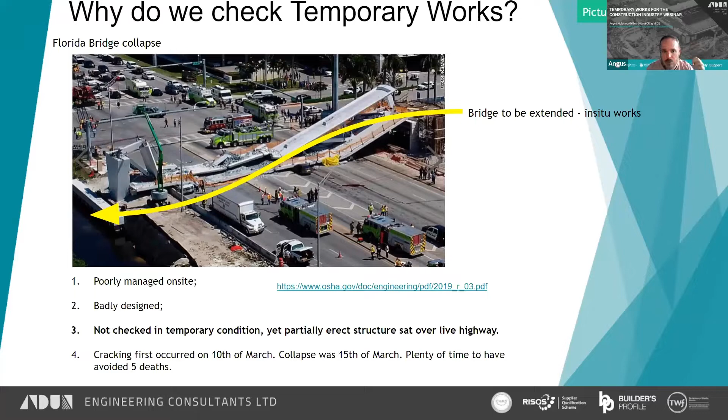And then perhaps the most shocking thing of all is that the cracks that led to this failure were actually discovered 5 days before the bridge collapsed. I still can't quite believe how they got to this point with live traffic running underneath it and nobody stood up and said, hang on a minute, this is crazy. But there you go, it's a worrying one.

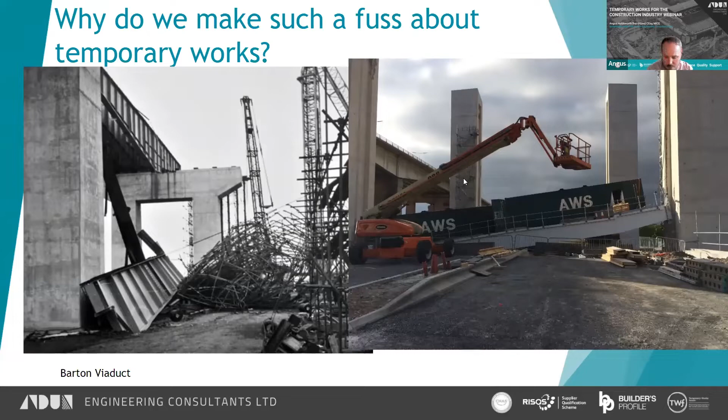So temporary works failures in this country - in the 60s and 70s, well, late 50s, 60s, 70s - there were quite a number of them. Barton Viaduct in Manchester, quite a few formwork and falsework ones, which I touched on a few webinars ago. We went through them. Fairly recently, 2016, there was a lift bridge in the temporary condition that failed just next to the Barton Viaduct in Manchester. So these failures are still happening regularly.

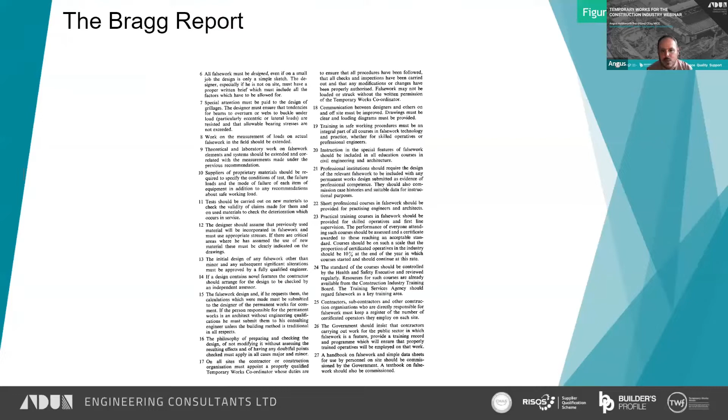Now, the collapses back in the 60s and 70s led to what we know as the Bragg Report, written by Lord Bragg. In there, he made, I think it was 27 or 28, suggestions or things that the construction industry should investigate and should start doing. You can see 6 to 27 here. The ones that interest us in relation to checking are these ones.

Interestingly, this was written specifically for falsework. We've now kind of extended the Bragg Report and BS 5975 out to take into account all temporary works. So where it says falsework here, read that as temporary works. One of the first points is that the initial design of any falsework should be signed off by a fully qualified engineer, along with significant alterations.

That makes its way into 5975. If a design contains novel features, it should be checked by an independent assessor. Again, that is in 5975 - or is it? It's certainly the Network Rail guidance. This one here is an interesting one, which we've kind of gone away with in the latest version of 5975.

The falsework designer should supply the permanent works designer with calculations for comment. In the latest version of 5975, it clearly states that calculations do not form part of the output. So that's an interesting one - I hadn't picked up on that. We've gone away from that in 5975, and there must be some reason for it, but I'm not really sure what it is.

So the philosophy of preparing and checking again, and checking the design, of not modifying it without assessing the resulting effects, and of having any doubtful points checked. That talks quite a lot about checking, and that's all fairly well formalised in 5975.

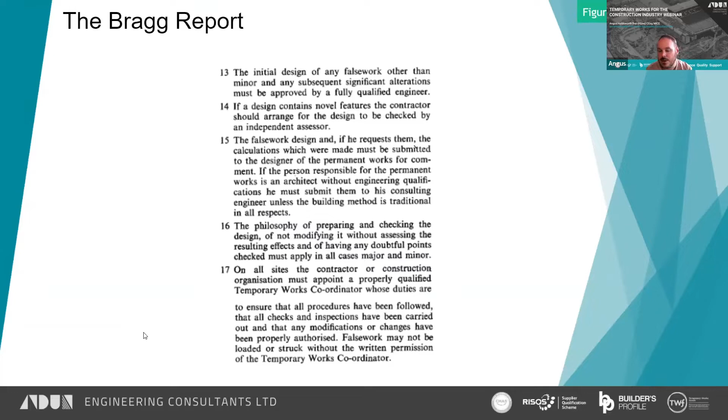Right, why do we check? Sorry, I'm just going to have a bit of a problem with my screen there. Why do we, or it certainly seems to me that we pay a lot more attention to checking temporary works than we do permanent works.

There are circumstances where permanent works might get Cat 3'd or what we would call Cat 2 checked, though I don't think it's quite as common as it is within temporary works. For permanent works, it's quite often just another engineer reviewing the calculations and the drawings rather than going away and doing their own independent assessment.

But one of the reasons is with temporary works, there have been a lot of failures that have led to people dying, as I've said. Bragg Report tells us we should do.

And when you think about it, or when you look at it, construction and demolition is fraught with issues as permanent structures in temporary conditions. These might be conditions or loadings that the structure has never seen before.

We have comparatively large loads applied to temporary structures quite often, and they're not normally as heavily built as a permanent work structure. So large loads could be tower cranes, could be mobile cranes, piling rigs, stockpiled materials, all of these things. There's often a lack of information on the historical structure, so that's where you're dealing with an existing structure, obviously.

Poor permanent works designs, which makes construction far more hazardous. If you've tuned into these webinars before, you would have seen examples of this.

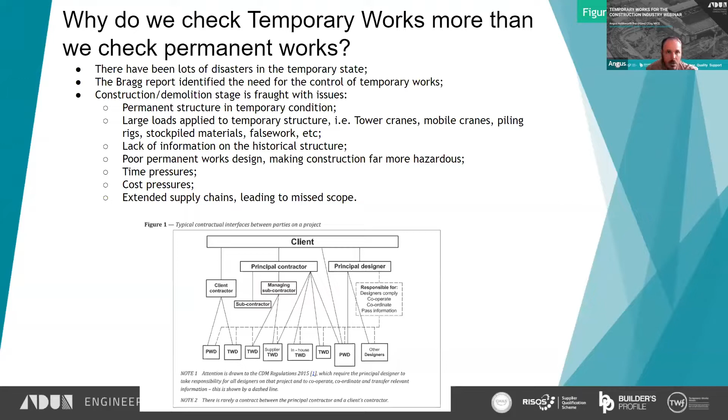So when you say the word checks or checking temporary works, people often jump straight to, oh, it's a Cat 1 or a Cat 2 design check. There's a lot more that goes into checking temporary works than just that. There's checking the information provided in the brief.

So that's looking at the brief, looking at what we've been provided with, and checking and understanding what it is we need to do as a designer.

Checking the correct information is used in the design. So again, what has the brief told us? What do we know about the structure already? What other information do we have that we can use to facilitate the design?

A massive part of checking to me is making sure the design looks right. If a design looks right, it stands a good chance that it is. If something looks wrong, 95% of the time it is going to be wrong. It's a very old saying that if it looks right, it is right, but it really does work in reality, and you can often spot issues just by looking at a design very quickly.

A key part to me is this idea of checking what the design has done on paper feeds into what the drawings show. So in many design offices, you have the engineer and you have the draftsman.

That straight away leads to an interface where what the engineer wants and has done has to be produced in the drawings. We work slightly differently - we don't have draftsmen, we have engineers who do the engineering and the drawings as well, to cut down on that interface. It's the way we've always worked. It means the person doing the design is also doing the drawing, which we believe leads to a better product because there's no interface. Often when you're doing the drawing work, you spot something you'd do slightly differently to the design. Often the drawings and calculations are done in tandem, which leads to a better solution quite often.

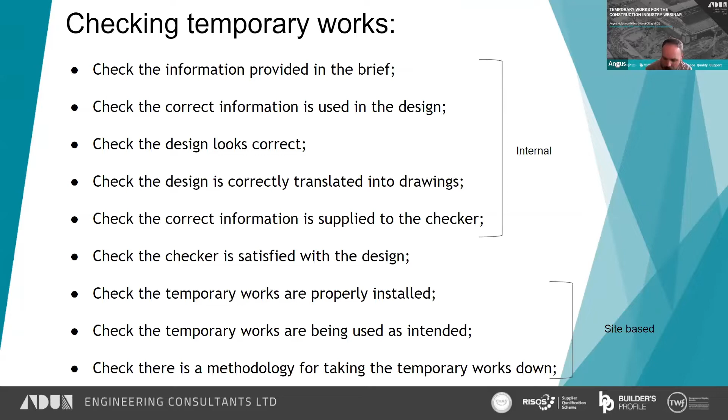So checking the input - we have this saying, it's not ours, but GIGO, garbage in, garbage out. It's one of the things we spend a lot of time drilling into the more junior guys who've joined us more recently. If you put the wrong input in, you're going to get the wrong output out. You can't help it - if you've got the wrong information at the beginning, what you produce is not going to be correct. A lot of that comes back to the quality of the brief you're given.

The classic with temporary works engineers is where the client specifies in the brief that we want to use RMD, or maybe we want to use MGF components. You complete the design using those components, send it back to them, and they say, oh no, we wanted to use such and such - even though the brief requested one thing. It's time and money wasted.

The brief document really is, to us, the most important thing there is when you're doing design, and indeed when you're checking, because the checker needs to look at the brief as well and ensure the design complies with it. So the brief should be quite a detailed document. It's obviously relative to what you're designing, but it should highlight everything the TWC or project manager on site has in their head about what they're trying to do, the constraints on the site, etc. It should be fed through so the designer can take that information, read it, understand it, and use it.

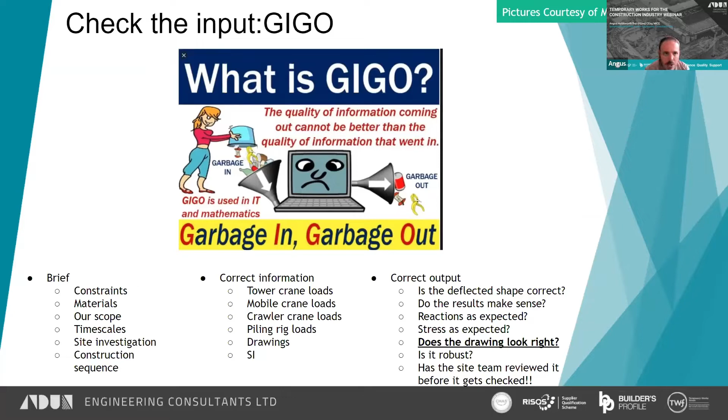So the checking that you're probably most familiar with when we talk about checking is these check categories from 5975. They go from 0 to 3, with 0 being the least onerous, 3 being the most onerous. 0 is really for standard solutions, off-the-shelf products you can use, and you're just basically looking at the instructions and saying, yeah, it complies with that.

Category 1 is for fairly simple designs. We're going to go through some examples a bit later on, but the examples given here are formwork, needling, propping to brickwork, that sort of thing. So with a Cat 1 design, there should be a formal design undertaken, but the checker just has to be someone who hasn't been involved in the design. They can pick up your calculations, read through them and say, yep, I agree with what you're saying here. Good to go, sign the check certificate, job done.

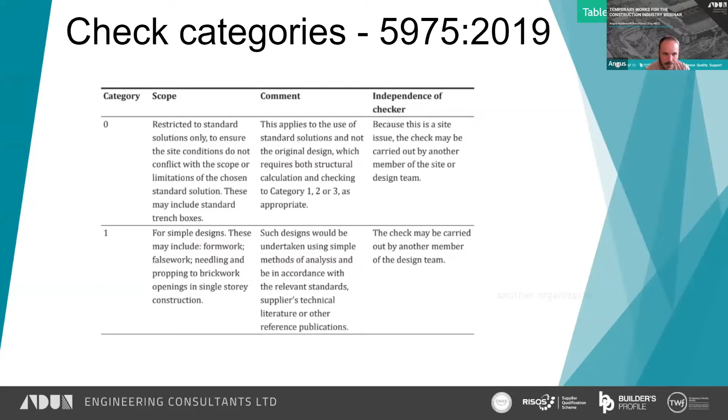Category 2 checks is a bit more onerous than that, or quite a bit more onerous. If I did the design, or someone in the Chelmsford office did the design, ideally we would try and send it to one of the other offices for the checking. Not always possible, but ideally you would send it to another office where you can say with certainty that they weren't involved in the original design.

And then what you issue them is the design brief, your design methodology, and the drawings. You don't issue them the calculations at all. Then the checker works from that input information - the drawings, the brief, and the design methodology - and they do their own set of calculations to demonstrate that the structure works. So you should be receiving 2 sets of calculations, 2 independent sets of calculation. A Cat 2 is not a review of the designer's calculations. Never has been, never will be.

Category 3, similar to Category 2, except instead of another office, it goes out to another company. Interestingly, the definition in 5975 is another organisation. That will be interesting when we get to looking at the Network Rail definition, because it's slightly different to 5975.

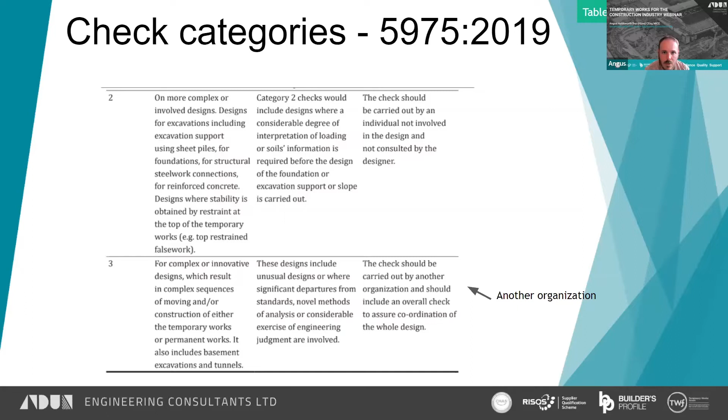This is just a blurb that comes in 5975, which spells out certain items. I'm not going to read them all out.

Again, I'm going to touch on Category 2 and Category 3. The checker should carry out the checks without reference to the designer's calculations, using only the design brief, including associated information and the design output.

Okay, it says it there in black and white. The number of times we see designs that are supposed to be in Cat 2 checked, and all they've done is read through the calculations and put their signature in the top right corner. That's not a Cat 2 check. It can't possibly be, because you've looked at the calculations.

The reason we do Cat 2 checking is because it's very easy to take somebody's design and follow through their methodology and say, yeah, well, that makes sense. Whereas if you take a step back and have to think about the problem yourself from the basic input information, you will approach it in a different manner, and you will then be able to check the

design separately. You're not going to follow what I'd call going down a rabbit hole and follow what the designer's done. So they might have made a silly assumption that seems reasonable, but by standing back and reflecting, you come to a different conclusion. That is the point in a check. It's not just to prove that everything's bang on. It's for you to sit and look at it separately and say, well, hang on a minute, have you thought about this?

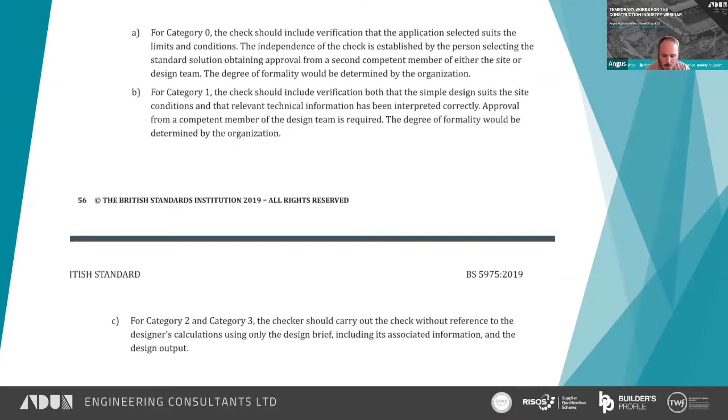I don't know why that's blank. So within 5975, we have this - what's it called - terminology, the implementation risk, which shouldn't be confused with the check category.

Okay, I still can't quite get my head around this as a system, but the idea being that you can have something that's high hazard to build that is low hazard as a design check.

Now, that might well be the case theoretically, but I'm yet to see it in practice where you have something high hazard, such as, I don't know, like a trench box that's being put in next to a railway or something similar. I've never seen in practice that would still get a lower level of checking, because although the design is still fairly simple, the hazard of failure is high. So I've always seen that people still want a higher level of checking than if that was just a trench box in the middle of an open field.

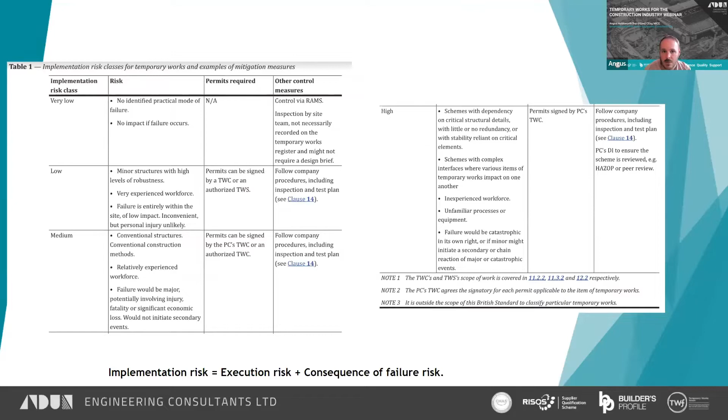So for instance, if you checked a trench box over here, it would be low on the implementation, might even be very low. No, probably low actually looking at that, on the implementation risk, and you'd probably get away with a Cat 1 check. It might even be Cat 0, but the chances of you being able to do it in here next to network rail infrastructure, implementation becomes high, but in practice, I would say that the check level would also become high. So although the 5975 says these two things are supposed to be separate, I don't believe that's how it's working in practice.

But I'll be interested to hear what anyone else has to say from their own experience. I'm not seeing it currently, but there you go.

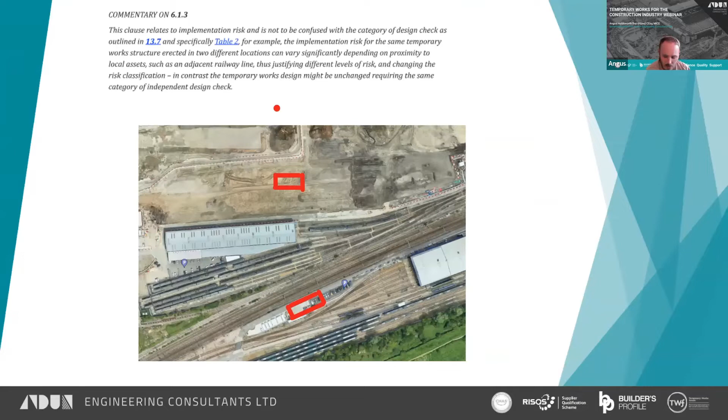Right, so Network Rail also identifies check categories themselves within Civ 003, which is now on issue 7, I believe. Fairly similar, though there are some slight differences to 5975.

So Cat 0, same design team, different member of staff. It's a review. There's a little bit more guidance there, but nothing drastic as a change.

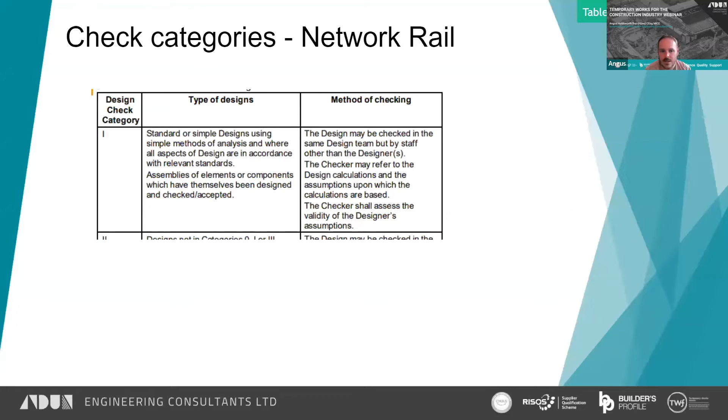So it says there, Cat 1, the checker may refer to design calculations and the assumptions. The checker shall assess the validity of the designer's assumptions. Yeah, fine, very similar to 5975.

Then we get to Category 2 and Category 3. Interestingly, in 5975, the definition of a Cat 3 checker is a separate organisation. In Civ 003, it's a separate legal entity. Now, that's not much of a change, but the way I understand that is there has to be a completely standalone organisation, i.e. there's two separate PI insurances in place, is the way I've seen it, and it's been discussed in the past.

So if it's a larger organisation, they hold one PI policy, but there's almost, let's say, 2 trading names, you can't do a Cat 3 check because it all comes back to the same legal entity at the top. Whereas if it's 2 entirely independent companies, that clearly falls under the definition of a separate legal entity.

Guidance is fairly similar, but again, design checks should be carried out without reference to design calculations. It's in black and white there for category 2. The design check methodology and analysis shall be independently derived against the common set of design criteria.

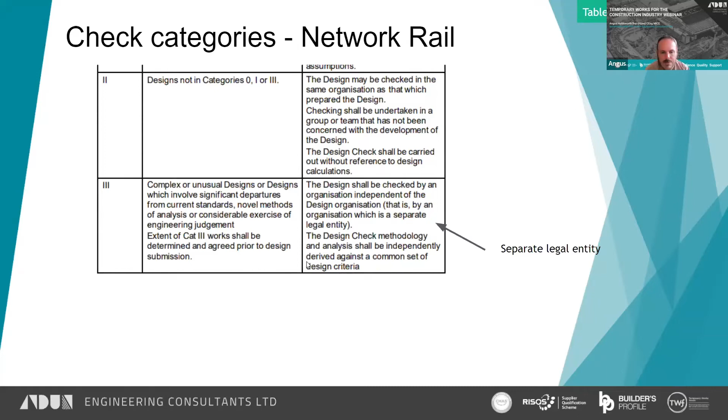Again, it's a little bit slightly different the way it's worded. CIV/003 does go into it in a bit more detail in here, specifically as to what they want to see for Cat 3 checkers. And interestingly, Network Rail specifically asks that the software is identified in the checker's statement. I think that's to make sure you don't end up with the designer and the checker using the same piece of software, which isn't ideal, does happen, but ideally you would use 2 different analysis software if you could. That's not always possible because some software there's only certain things they can do.

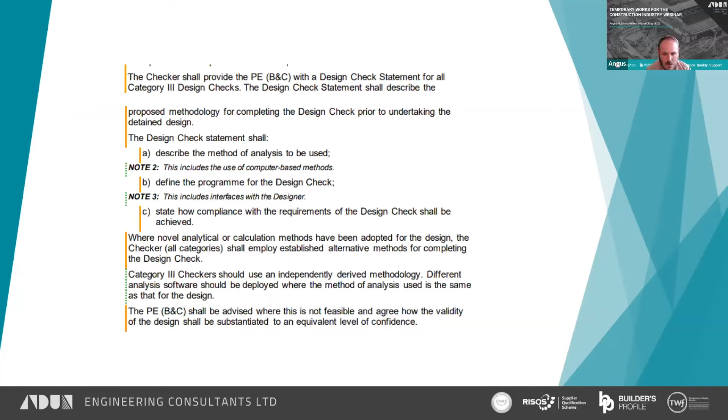Again, you can read all this yourself, but the key point to take away is they expect the category 3 checker to come up with an independently derived methodology. It's not, you shouldn't just be looking at what the designers put in the design statement and just following it. They want you to think about it differently to ensure that you've used a different methodology and that Cat 3 check is okay.

So people often want to know what these different categories mean, and how you categorize things. I guess the simple answer to that is you have to use your judgment. It's not necessarily something that can be written down in black and white, though I am just about to attempt to do exactly that. However, these are examples. I don't know your site constraints, I don't know anything about your project, I don't know about the competence of the people installing it, etc. You need to look at it yourself and decide what category of risk it is. As I've said, I'm not a fan of tabulating it and saying this is automatically a Cat 1 or a Cat 2 or a Cat 3, because it depends on lots of things.

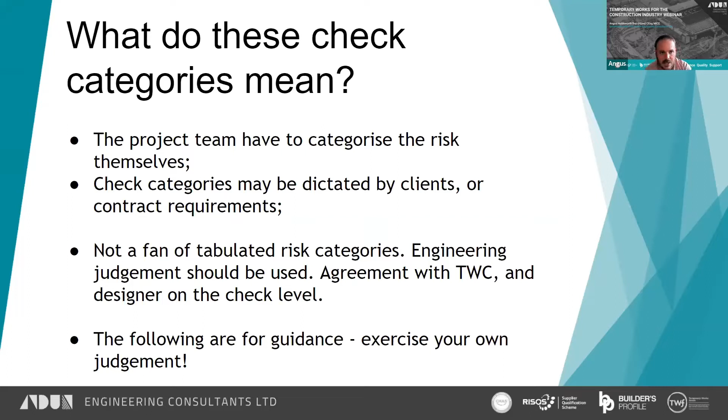So category 0 check, a simple thing like a trench box. In fact, many suppliers now have off-the-shelf design packages available for these, that clearly identify when they can be used, when they can't be used, what the surcharges are, what the maximum pressure is. It's a simple case of taking the instructions for the trench box and then looking it up and saying, yep, I comply with those constraints. Job done.

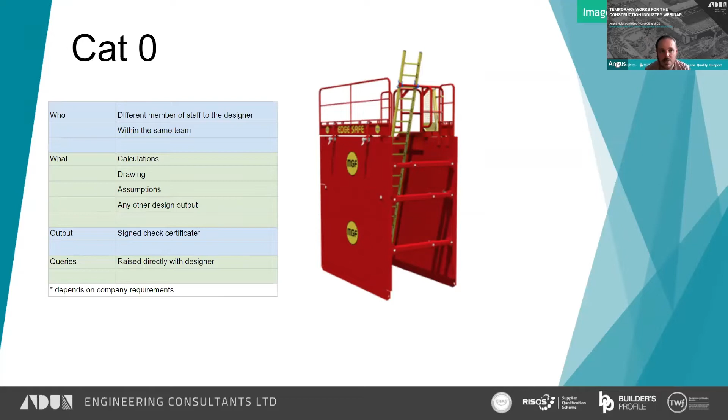Someone else can then look at those calculations, or it might not even be calculations. It might be as simple as identifying in a brochure what you're using and why, and then agreeing that it's okay. There are plenty of other trench boxes available, I just found a nice picture of an MGF one. There's loads and loads of suppliers.

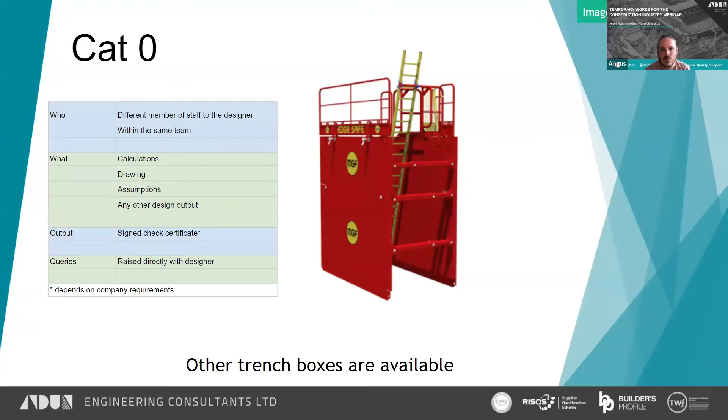Anyway, so within CIV/003, Network Rail have listed out a series of items they consider to be Cat 0, which again you can read there. I'm not going to read through all of them, just going to pick out some interesting ones. So site hoarding only needs to be Cat 0 unless it's on a platform. Edge protection where it's for construction organisation, that's fine. Ground support for scaffolding, so foundations for scaffolding, where it's fairly obvious it works. Shallow trenches not exceeding 1.2 metre deep is their cutoff.

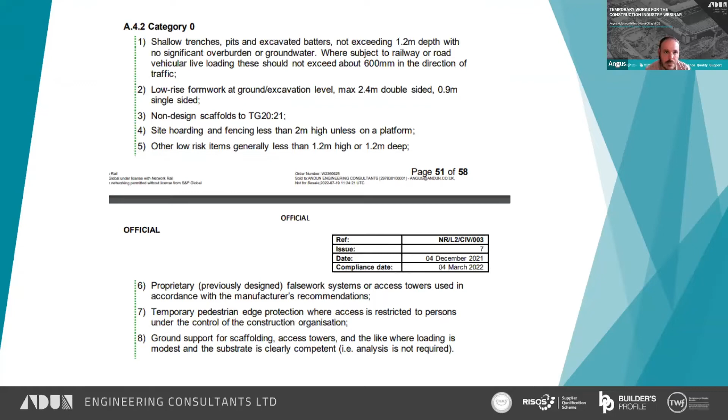That can then be reviewed by somebody in the same team, though not someone who was involved in the original design. You should be looking for them to go through the calculations and sign off and say, 'Yep, job done. I'm happy with that.'

There should be a signed check certificate still for Cat 1, and if there's any queries, you just raise it directly with the designer and resolve it between yourselves. Cat 1's normally an internal check or within the same company, so it should be fairly easy to resolve any issues between yourselves, I would hope. Otherwise, something's probably gone wrong.

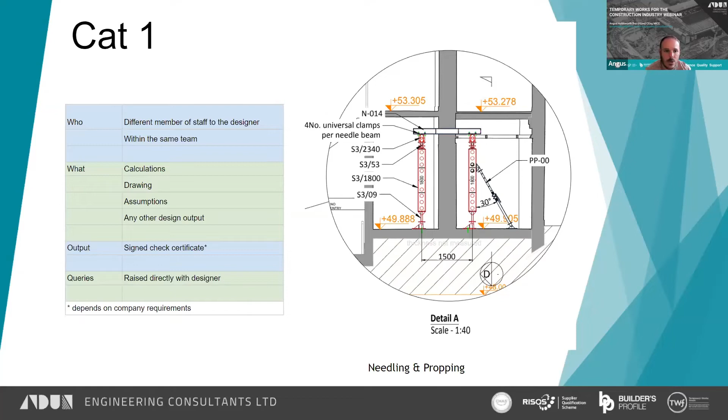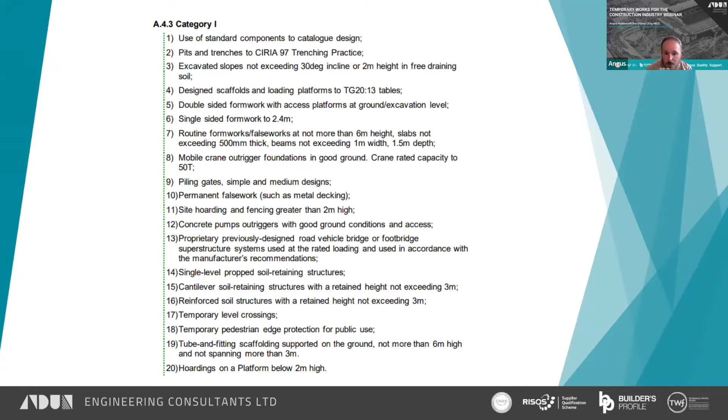Hoardings and fencing greater than 2 meters high falls into this. Reinforced soil structures with a retained height not exceeding 3 meters. Cantilever soil retaining structures, so sheet piles not exceeding 3 meters. Hoardings on a platform below 2 meters high. Interesting, that one - I'm quite surprised that hoardings on a platform get into category 1, but there you go.

Category 2. An example of this was a fairly simple demolition scheme where it wasn't in a possession, there was nobody going underneath the structure. It was all on a construction site on a disused road, no time constraints. So it was a fairly simple piece of demolition that really consisted of working out the weights of the steels and then lifting them down piecemeal with a bit of propping in the middle. A little bit of stability as you worked your way into the structure, but nothing too complex.

The designer should have produced, or did produce, drawings. You can see excerpts from them there, and they produced a design methodology or design statement, depending how you want to call it, and that was issued to the Cat 2 checker to undertake a Cat 2 check. They didn't look at the calculations, they worked from that information, and at the end of it, they gave them a signed check certificate and a design check statement to explain how they'd undertaken the check themselves.

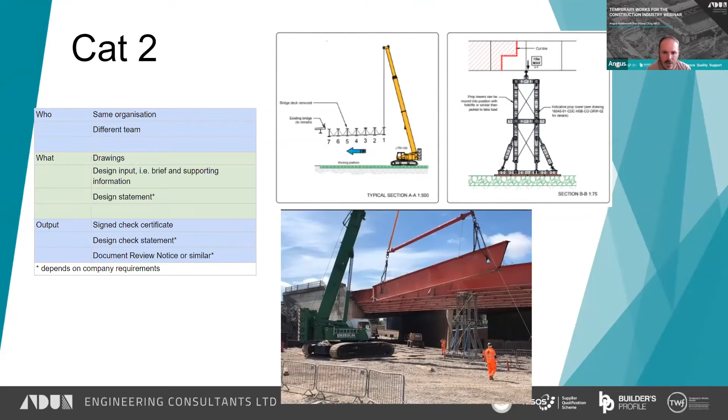And there should be now a 5975 required document review notice, a DRN form, for Cat 2 checks. So that just formally records what was identified as needing to be changed or needing further discussion with a checker, with a designer.

So in category 2, Network Rail have quite a lot more information or options in there. Underpinning gets into category 2 checking, barge mounted equipment gets to Cat 2, facade retention schemes goes into Cat 2, conventional tower crane bases is Cat 2, temporary station platforms, tube and fitting scaffolding not supported on the ground, demolition of single span masonry arches - the single span being the important part there. Anything above that gets into Cat 3.

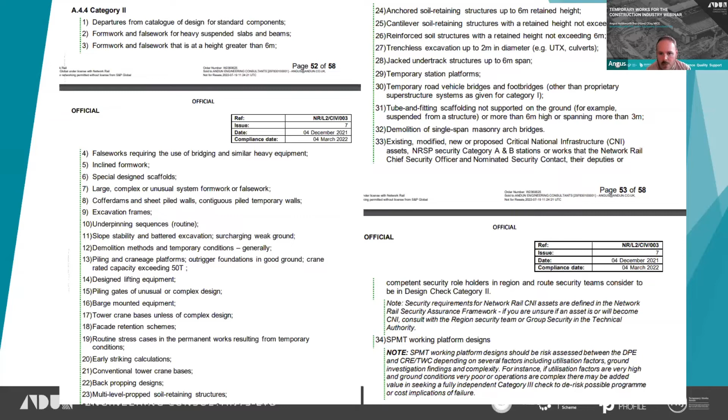SPMT platforms, so that has to be agreed. Cat 3 is where you get into the more complex.

So for instance, Churchill Way that we did, that was all Cat 3 checked. It was a mixture, actually - it was a split between the temporary works, which was checked by one person, and the permanent structure in the temporary condition, which was checked by another, with the interfaces picked up by them as well, i.e. checking the prop loadings that were then used in the checking of the temporary work.

And the reason that was done is the competence of the Cat 3 checkers. We needed somebody who had a good, or a demonstrable, track record of analysing post-tensioned concrete to satisfy the Highways Agency. So I think it was Ramboll that did the Cat 3 checking on the structure, and then the temporary works was checked by Moreland.

There you go. So that was clearly a different organisation to ADUN, us, who did the design. The output that was issued was, in this case, an AIP, drawings, our design statement, and the brief that we received. That was all issued out for checking.

And the output that came back was an Excel sheet with comments from Ramboll, eventually a signed check certificate, and in that case, the AIP check certificate, and their design check statement explaining how they'd done it and what they'd looked at.

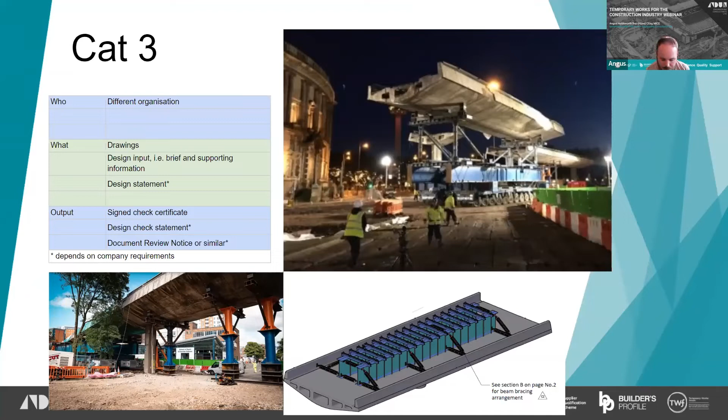Within Cat 3, there's quite a lot of information or tasks that Network Rail consider to be Cat 3. There's some large catch-all categories, such as unusual concepts, bridge erection schemes, demolition of multi-span masonry arches, demolition of non-masonry bridges, partial demolition or modification of existing structures, underpinning in poor soil, complex or suspended tower crane bases, boring or driving of tunnels, abnormal stress cases in permanent works resulting from temporary conditions, any use of the observational method for geotechnical works, work on sensitive clays, and an interesting one - demolition plant operating on a suspended slab where more than the immediate bay floor is vulnerable.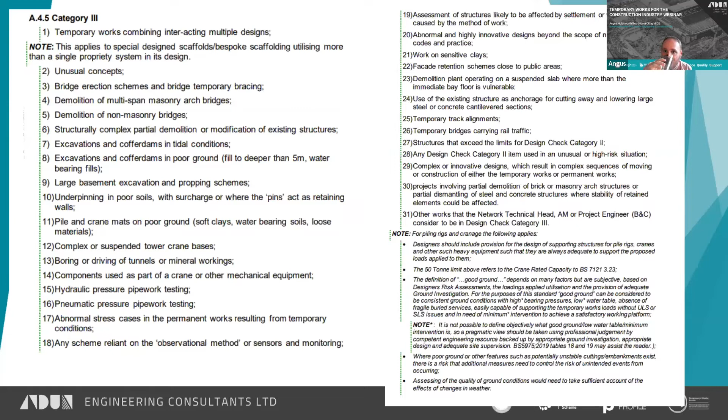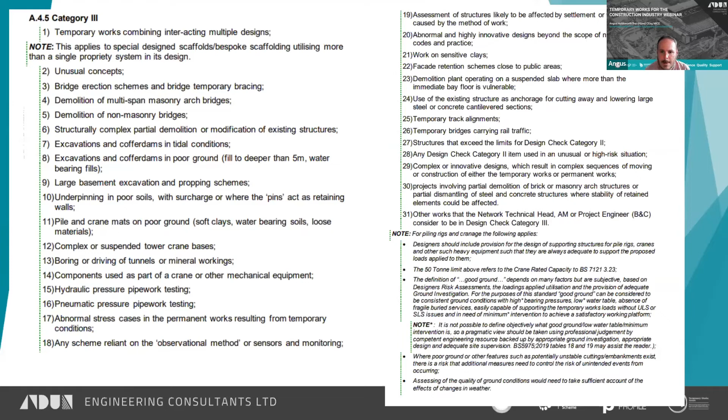That's an interesting one - that pretty much means any structure where you've got more than one storey, I guess. Use of existing structure as anchorage for cutting away and lowering large steel or concrete sections. Projects involving partial demolition of brick or masonry arch structures, or partial dismantling of steel and concrete structures where stability of retained elements could be affected. There's quite a lot within here talking about demolition or partial demolition - I think they've added a bit more since the previous revision of CIV 003, and there's some explanation notes under there too.

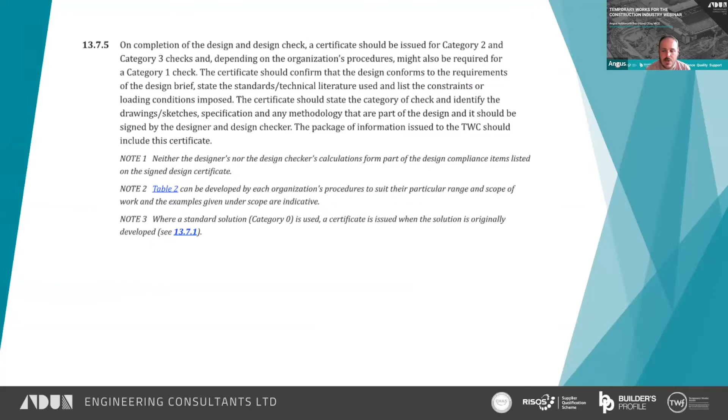I also know, in fact we've had a discussion on these webinars previously with Network Rail - Stephen Williams and Network Rail - that Network Rail will pretty much always want to see the calculations. The reason being, as Steve explained to us before, is because reviewing calculations has picked up a number of major failures in the past, which is why they almost always insist on seeing the calculations. Many other clients do as well, interestingly - even though we don't have to issue them, many clients will insist they're issued before they'll accept the package.

So if you're doing a design check, or someone's checking your work, 5975 sets out what should be done if there are differences of opinion between the designer and the checker. As I said going through Category 0 and 1, you just raise it directly with the designer and resolve it before it's issued. For Category 2 and 3, it needs to be more formal.

For Category 2, a schedule of queries should be prepared and issued to the designer and copied to the TWC. You shouldn't be copying in chunks of your calculations, although it's okay to show output from your calculation. For instance, say you've run an analysis and found a pile load is higher than the designer has stated - you could indicate that in the design review notice so people understand what you found and where, but you shouldn't include the calculations showing how you got to that load.

Does that make sense? You can say, well, I've actually got this load in this member here, whereas you're saying it's this load in that member - we need to resolve and understand why we've got there.

For Category 3, loads, idealized structures, soil parameters, etc. should be identified in an AIP or similar document. That's formalizing the requirement for a design statement, which basically sets out what the designer has done and how they've done it, without going into the detail of the calculation. So you should be able to pick up a design statement, read it, and understand exactly what the designer has done without having to look at their calculations.

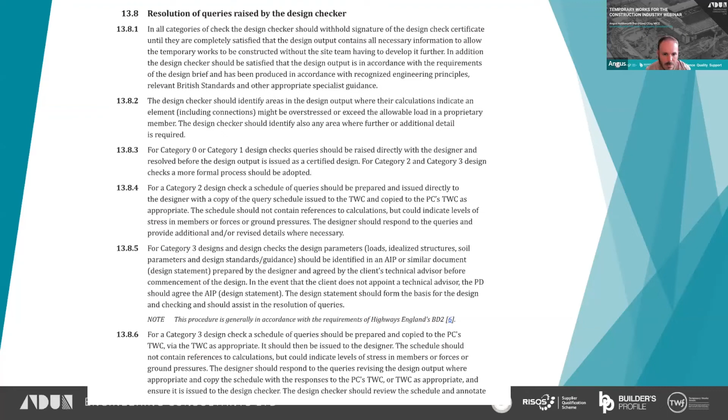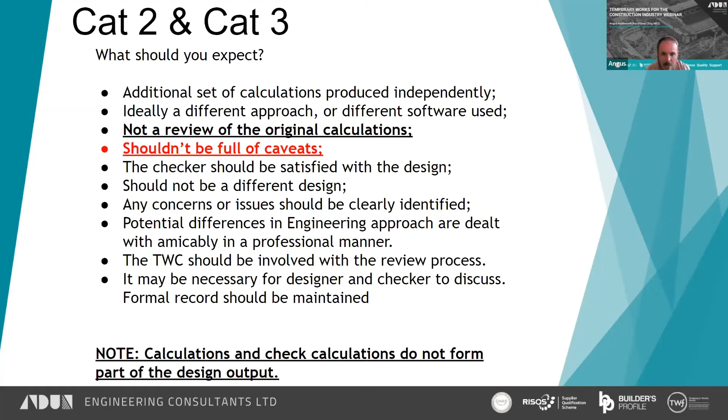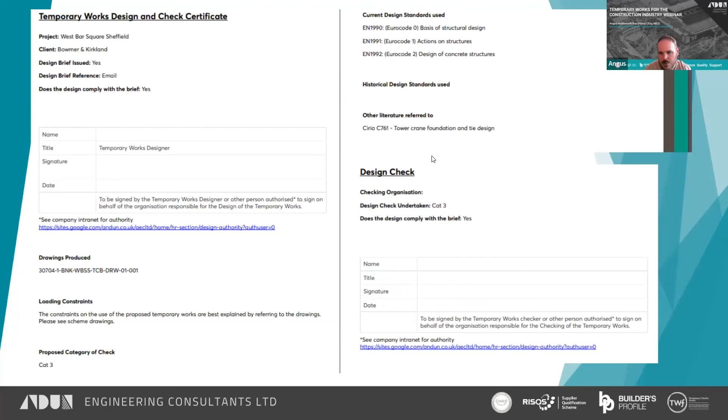Proposed category of check, we always put that on there because it might not necessarily agree with what the TWC has said. But there you go, the codes we've used, other literature that's been referred to. And similarly for the design check, it should say what level of check's been undertaken, does it comply with the brief, and it should all be filled in and signed off exactly the same.

Important thing to consider is listing out the documents and drawings utilised, because this forms, A, a record of what you've used in your design, and B, it allows the checker to understand the input information that they might need to look at in order to complete their check.

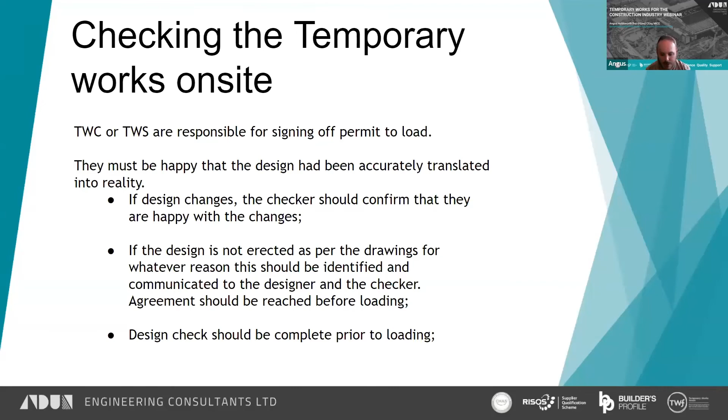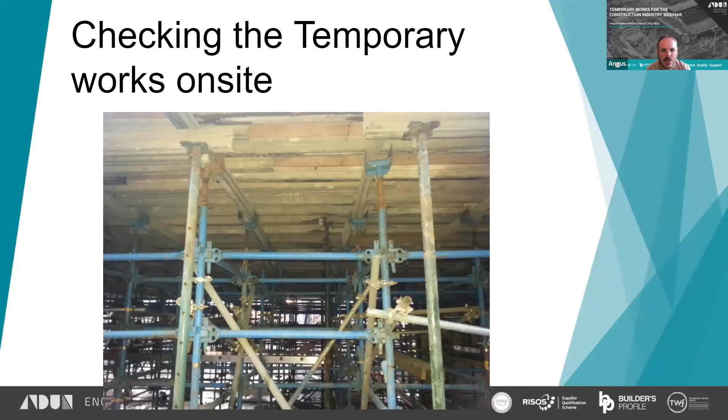A great example of lack of checking on a temporary works on site is this. Hopefully you can all spot it, but it's the U head here, which hasn't been loaded centrally. The alloy beam on top there is clearly eccentric and is suffering somewhat.

Another great example of checking - no need for the high yield steel pin for this push pull plumbing up a prop. Nope, just a bit of all thread rod. That'll do nicely.

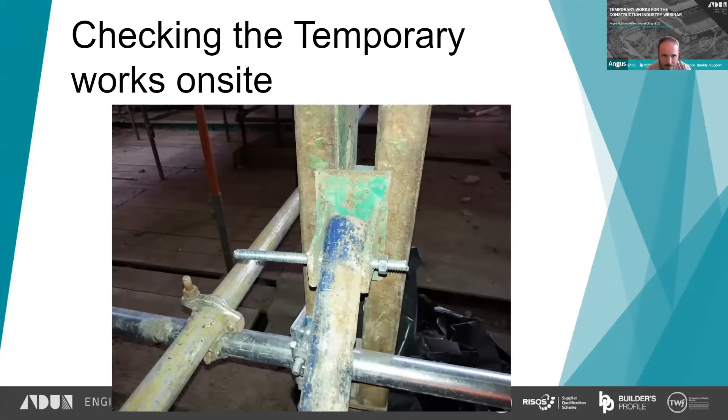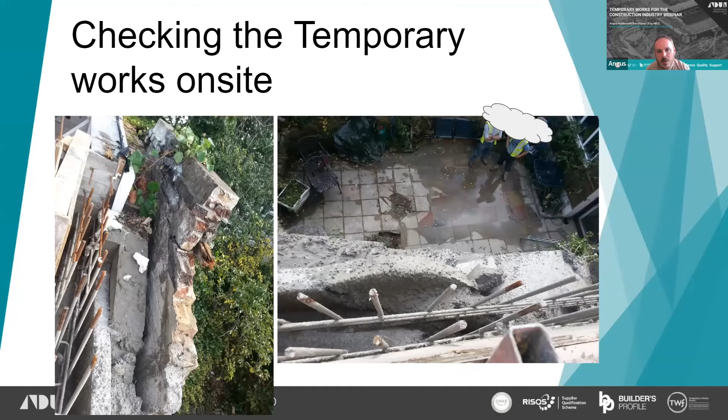Right, that's enough of that, and we are running out of time rapidly, so it should just about be okay. This is a short case study on the Army and Navy flyover, which is a job we completed a little while ago now.

I can't remember the years, probably 2 or 3. If any of you are familiar with Chelmsford, you may well remember the Army and Navy flyover. It made traffic flow in Chelmsford so much nicer than it is currently.

It was a flyover that allowed the A1114 to carry on into Chelmsford. It was bi-directional, so when traffic was coming out, you went this way, and when traffic was going in, it went that way. They had big signs to shut it off either end. Didn't stop a number of people crashing head on top of the structure, but you can't help stupid, can you?

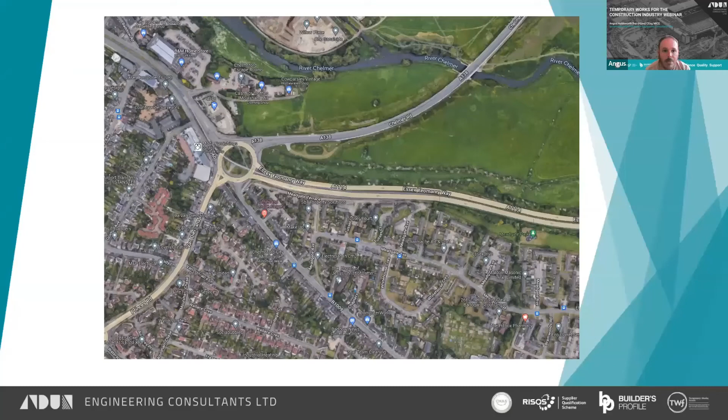Right, that was the structure kind of in a nutshell. It went straight up and over the roundabout as a flyover. It was originally built as a temporary structure back in, I think it was the 70s, so it did fairly well to last into the 2000s, quite a long way into the 2000s.

Unfortunately, the hot summer we had, which I think might have been 2018, might be 2019, whichever one it was, it was too hot and the structure couldn't deal with the expansion. And as it's on a radius, as it expanded, it actually tried to rotate and lifted 2 of the legs. At that point, the council made the decision that, you know what, this is life expired, which is unfortunate because I said it made a hell of a difference to the traffic flow in Chelmsford.

Just giving you an idea of it. So it's an approach ramp either side, then a fairly level piece across the top over the roundabout, and then quite a steep ramp back down the other side.

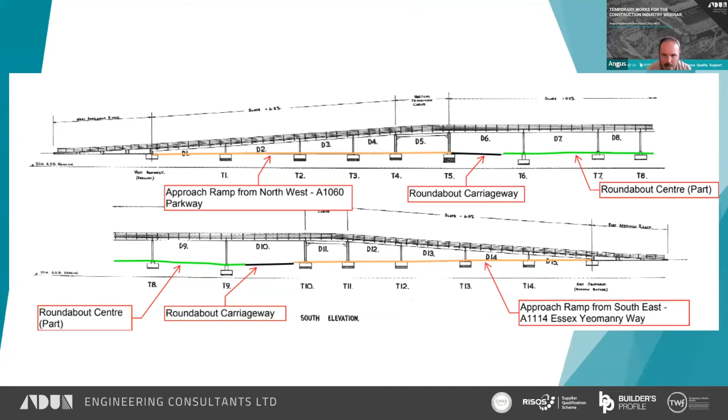So it wasn't the most complex piece of demolition we've ever been involved with by a long stretch. Not a great deal to do. The key things to consider really was stability of the structure as it was dismantled, weights of components, because it was all going to be taken apart by lifting it, and also considering the constraints of the site.

So you've got subways, you've got an old culverted river, there are any number of different things in the ground, and also rather interestingly, the soil in the middle of the roundabout was probably the softest thing I've ever seen with a plate bearing test. I don't quite know why, but it really was incredibly soft.

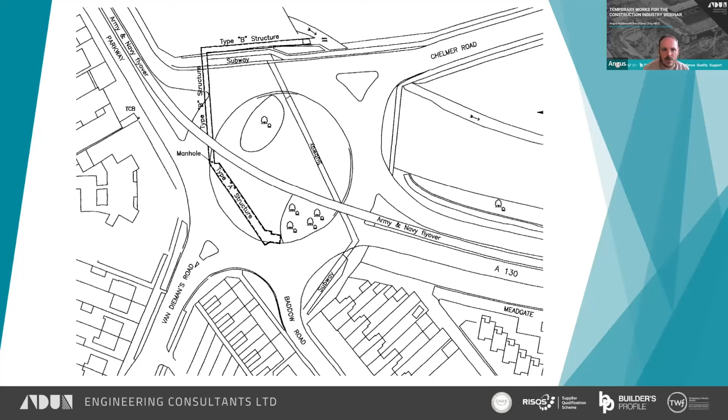So the proposal was to work our way out from the middle in both directions, avoiding all of the things in the ground that we needed to, and the design of a working platform there on the roundabout to facilitate the crawler crane operating.

It was probably the closest job we've ever done to the office in Chelmsford, which was quite nice. And at least the site visit was only 5 minutes away, which made a big difference.

So there was the assessment of the subways and also the culverted river. The culverted river wasn't a problem, it was the subway itself. When we analysed that, you could track the crane over it, but you couldn't operate the crane next to it. And we didn't really need to, so we established the exclusion zones, and that was it for those.

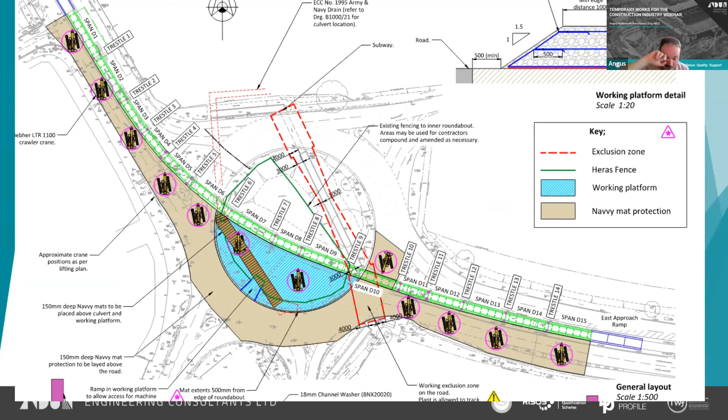Working out the weights, the heaviest lift was 34 tons, and then it was purely working our way out from the middle, back across, with stability for some of the piers that were to remain in place while the road was open, which was just a simple propping system.

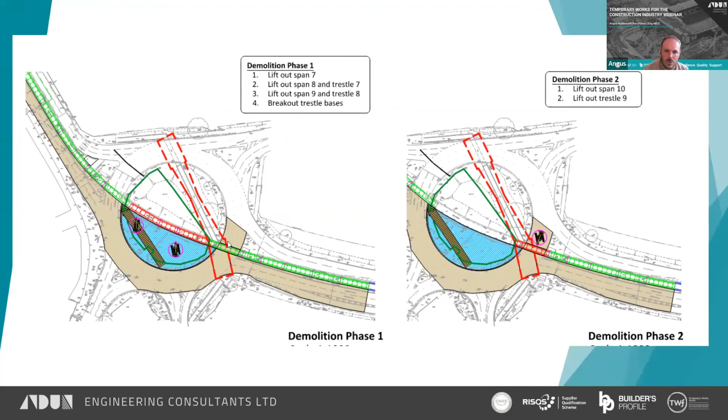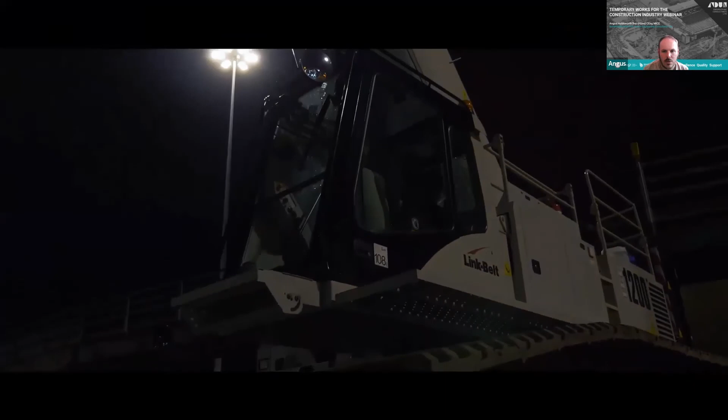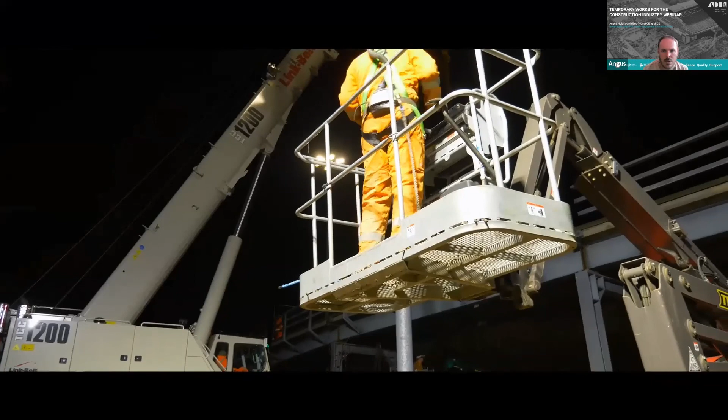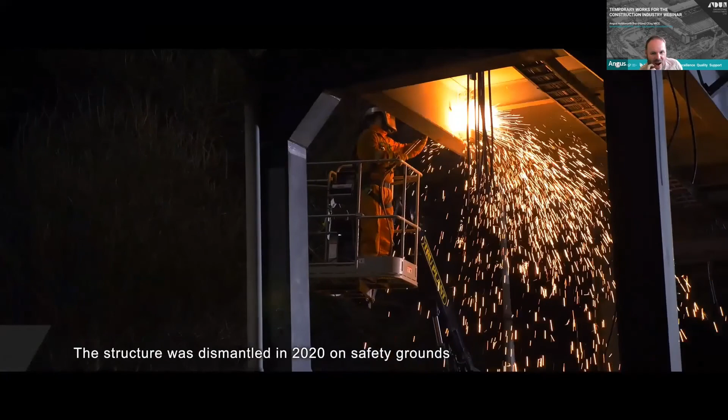So yeah, getting ready to cut them free, lift out the spans individually. It goes 2020, it was taken down. And just burning the bolts there to release the pieces.

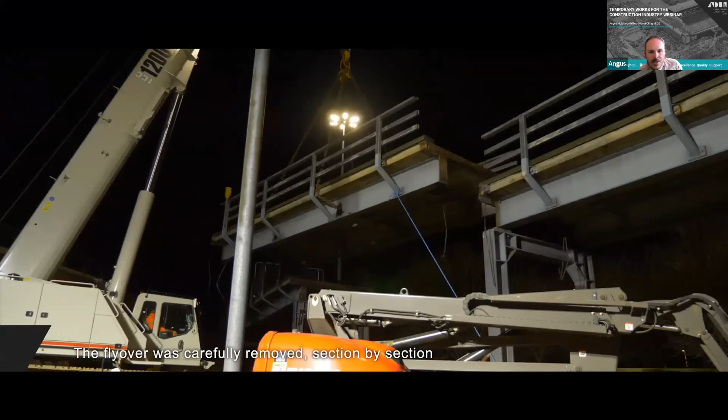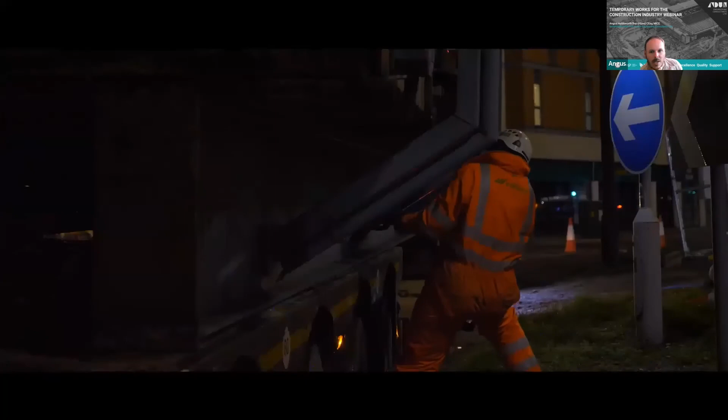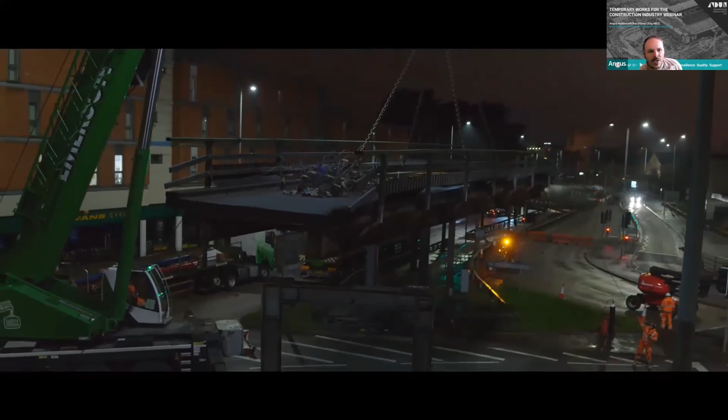And it pretty much was taken apart the way it was put together. You see one of the spans there. And they actually transported them pretty much each section in one piece. They took it to the CDC's yard in Ipswich, and it was broken up there.

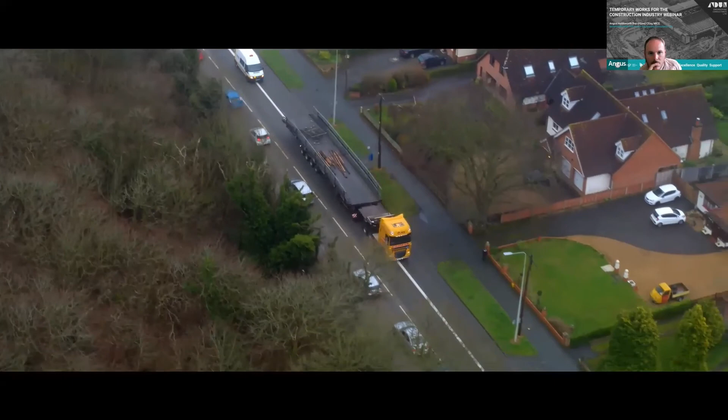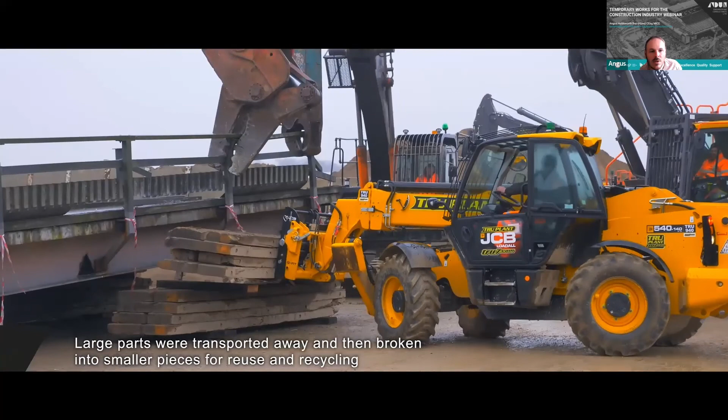Back to CDC's yard. Smashed up, and recycled.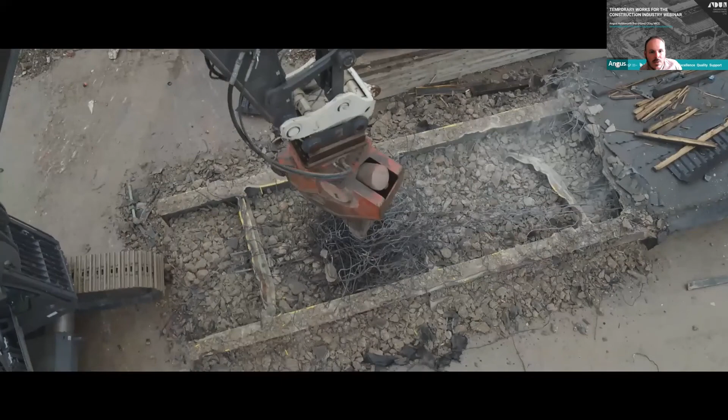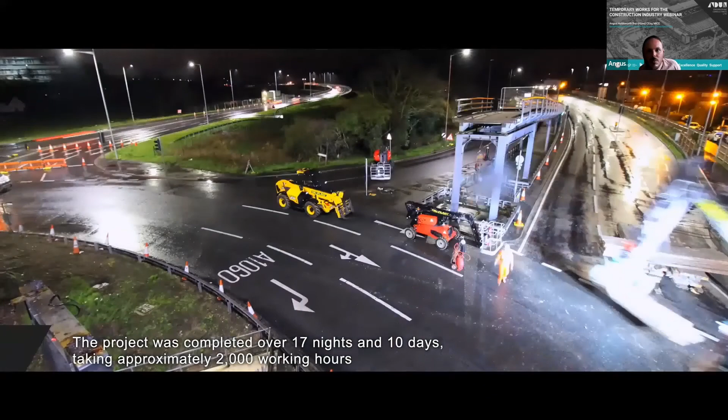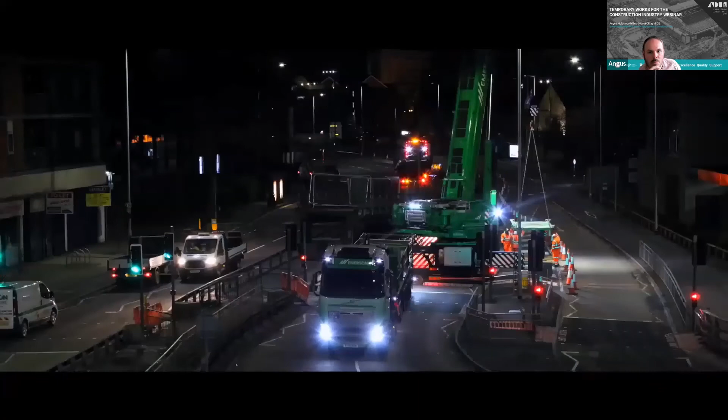The biggest span there, the 34-ton ones, were the ones over the road. The last bits are broken up in situ. Not much more we can do with them.

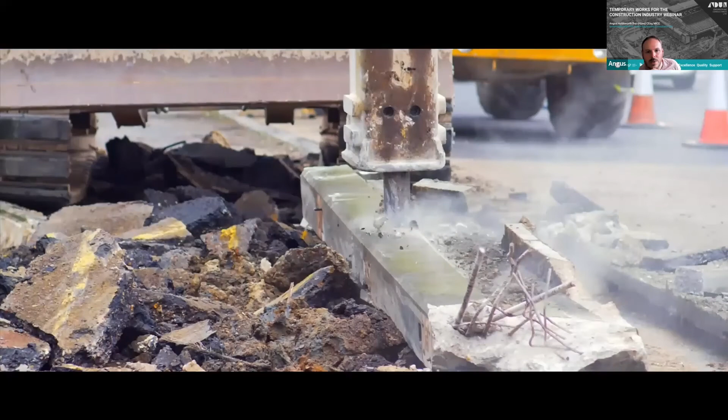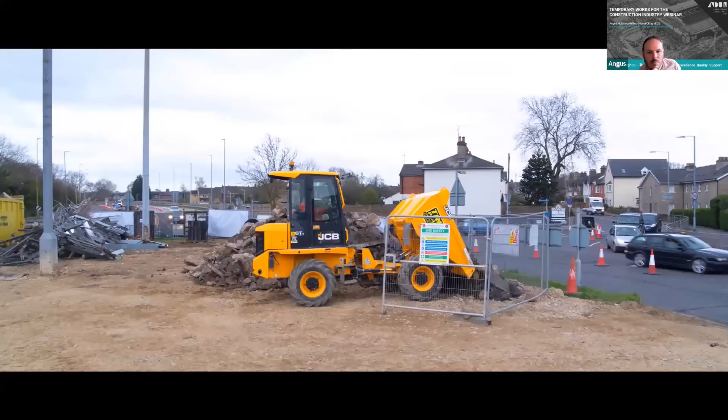I'm not sure why it was a crucial step, because as I said, it's just made the traffic flow atrocious, but there you go.